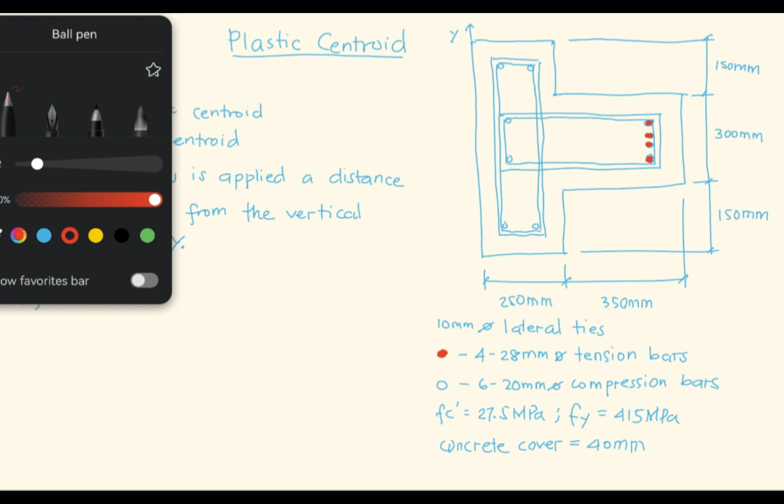So we now determine the geometric centroid. By the way, our reference y is located here. We do take note that along the x-axis, the section, the cross-section is symmetrical. So the geometric centroid is computed from this equation, that is the summation of the area multiplied by x bar. Say we have here the x bar.

So we consider the leftmost area of the concrete, so that is 250 by 600. We have 150 times 2 plus 300, that is 600, plus the other area, which is a product of 350 by 300. So this is the entirety of the cross section.

We multiply this by x bar equals the moment of the area from y, which is 250 by 600, and the moment arm from y is 250 divided by 2. The other area is 350 by 300. The moment arm will be 250 plus half of 350.

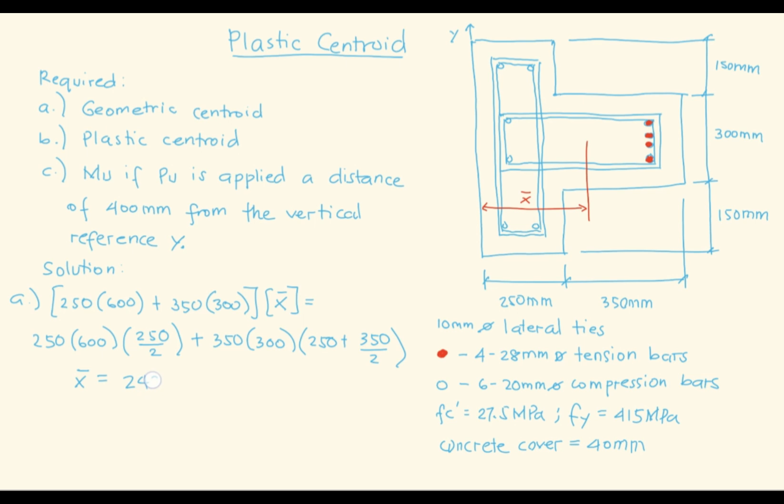From here, we determine x bar. This is equal to 248.529 mm.

So for letter B, we determine the plastic centroid. We first copy this cross section for reference.

In the determination of plastic centroid, we note that the concrete will be stressed up to 0.85 FC prime, and that on the other hand the steel still will be stressed up to Fy.

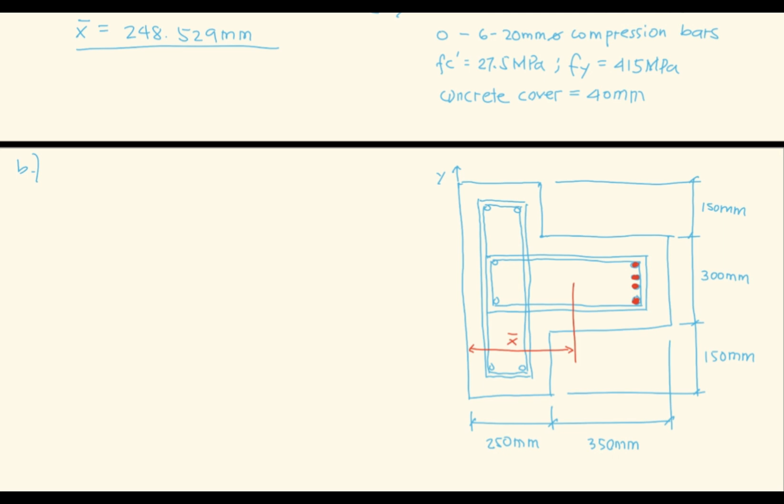So the forces from the concrete will be the stress of the concrete multiplied by the area. So that is 250 by 600 multiplied by 0.85 FC prime, 27.5, plus 350 by 300, 0.85 FC prime, 27.5.

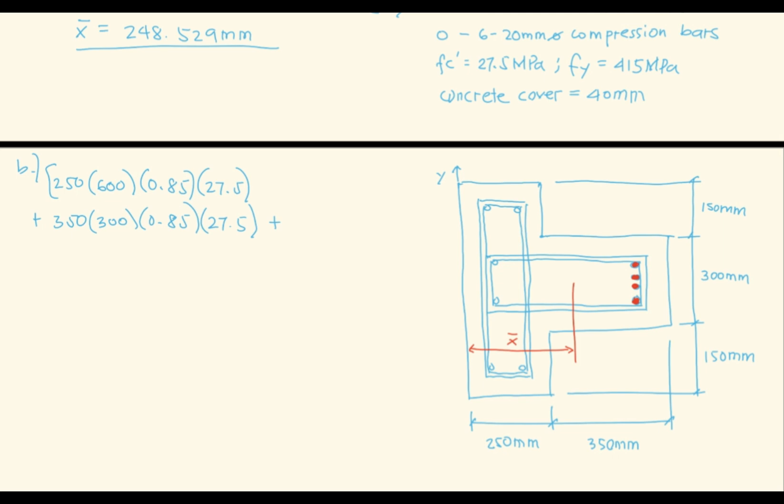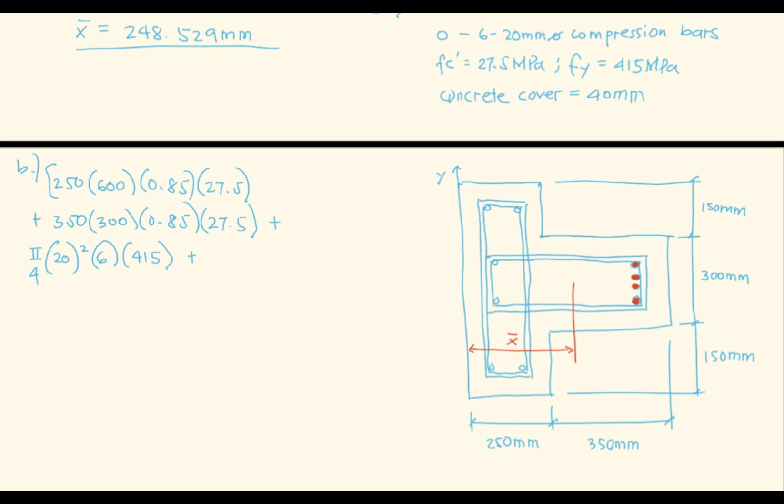So these are the forces from the two concrete rectangular cross sections, and then plus the force from the steel reinforcement, particularly the 20 mm diameter compression bars. So that is pi over 4, 20 squared, times 6, multiplied by Fy, which is 415. Plus we now consider the tension reinforcement. So pi over 4 multiplied by 28 squared, there are 4 of this, multiplied by Fy, 415.

So these are the total forces. We multiply this quantity with x bar. We equate it with the moment of area referred from the vertical y.

So we have 250 by 600, 0.85 FC prime. We multiply this force by the moment arm, which is 250 divided by 2.

We consider the other concrete area. So that is 350 by 300, 0.85 FC prime. The moment arm is 250 plus 350 divided by 2. Of course this is from the reference y.

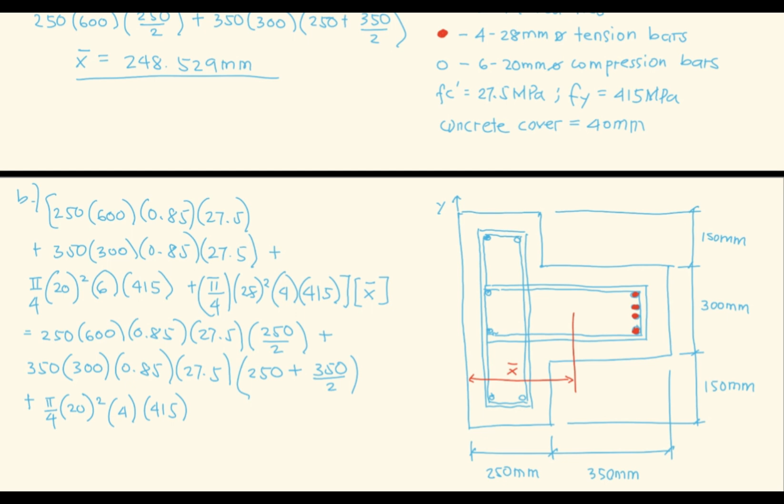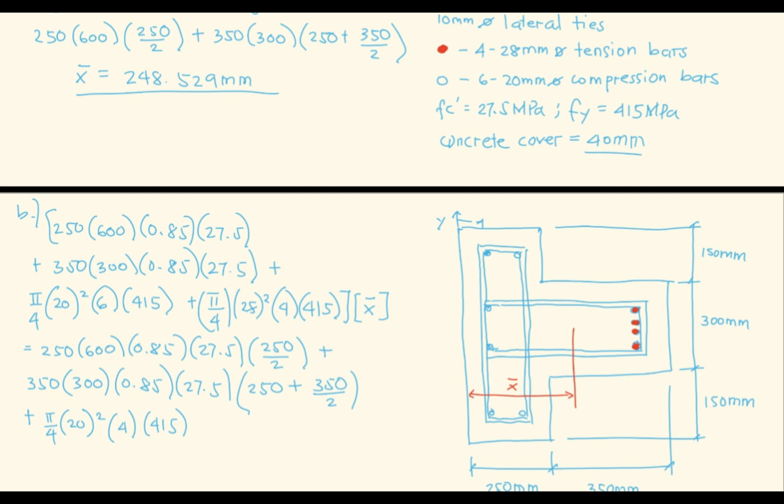So that is pi over 4 multiplied by 20 squared. We have 1, 2, 3, and 4 bars multiplied by 415, and the moment arm is, okay so the concrete cover is 40 mm, and the size of the lateral ties is 10 mm. So meaning to say, this is 40 plus 10 plus half of 20. So this is a total of 60.

Plus pi over 4 by 20 squared. This time we will be considering these 2 compression bars. So this is 250 minus 40 minus 10 minus 10. So this is something like 190 mm.

By the way, we have to multiply this by 2 rebars multiplied by Fy 415 and the moment arm 190, and then...

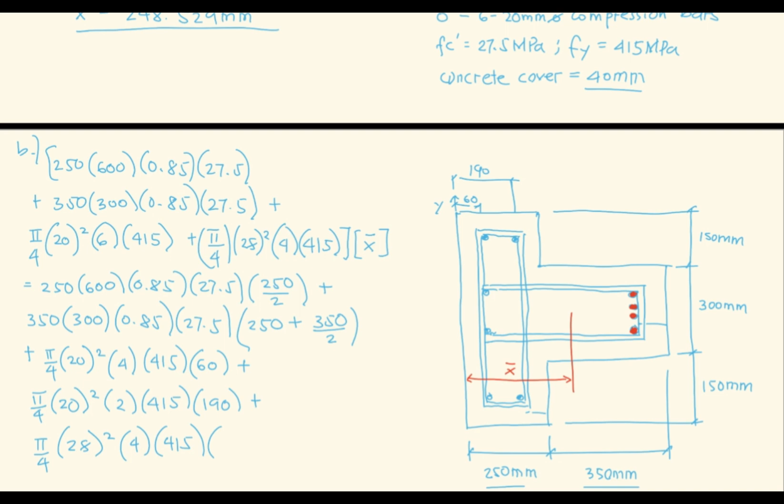We have to consider the tension reinforcement. So plus pi over 4 multiplied by the diameter of tension rebars, 28 mm. So 28 squared by 4 by 415 multiplied by the moment arm, which is 250 plus 350 minus 40 minus 10 minus half of 28. So that is something like 536 mm.

So we now determine x bar, and it is equal to 271.743 mm. So x bar is 271.743 mm, which is somewhere here, and it is at this point where Pu will be referred from.

As stated in item C, Pu is applied a distance of 400 mm from the vertical. By the way, we have to set a value of Pu, say 3,000 kilonewtons, for us to have a numerical value of Mu.

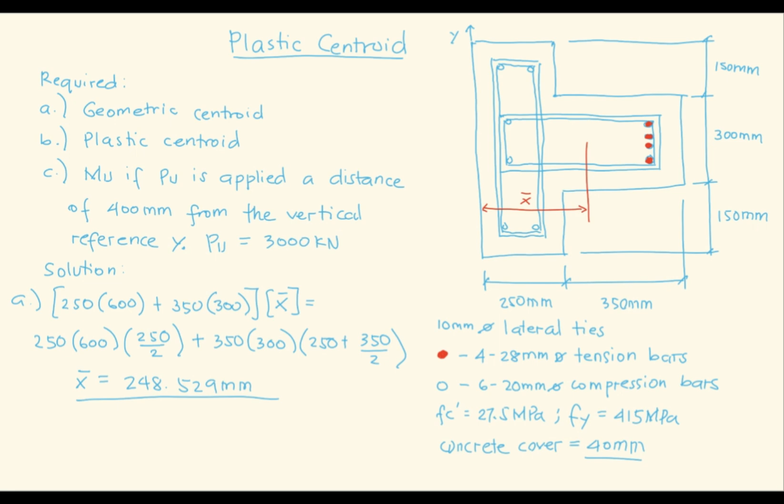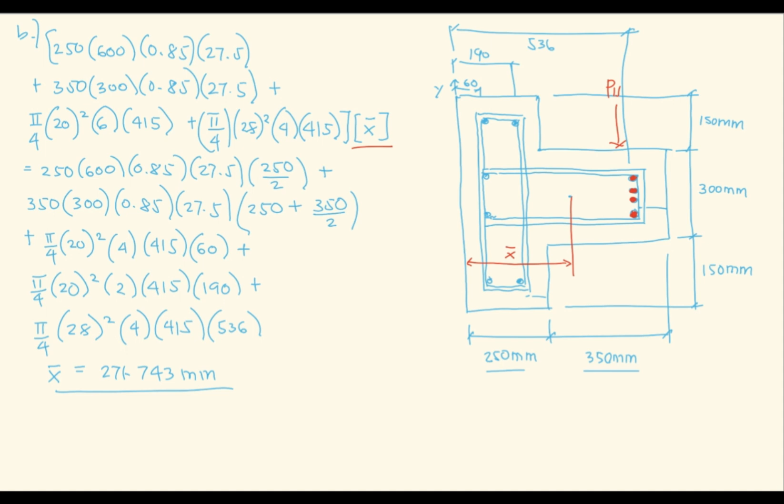So Pu, if it is 400 mm from the y, is something like in here. Say here, Pu. And the eccentricity will be referred from the plastic centroid. We have the eccentricity here.

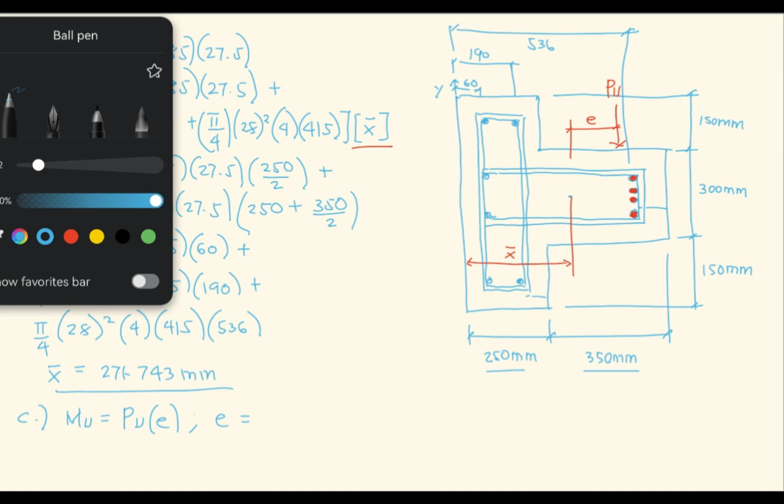So C is Mu equal to Pu multiplied by e. And e is the distance of Pu from y, which is 400 mm. Hence, e is 400 minus x bar. So this is 128.257 mm.

We'll multiply this value to Pu, which is 3,000 kilonewtons, multiplied by 128.257 mm. We convert it to meter, so we divide by 1,000. This will give us 384.77 kilonewton meter.